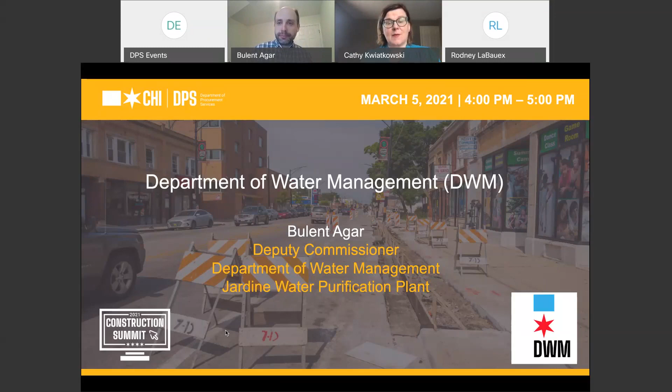Thank you, Cathy. I'm Bulent Agar. I'm the Deputy Commissioner over Engineering at Department of Water Management. I'm here representing Andrea Cheng, our Acting Commissioner. And this afternoon, we'd like to go through some of the projects that are coming up, but I'd like to give a quick overview of our department to highlight water and sewer and facilities sides.

And again, everything goes back to our most precious resource, Lake Michigan. Great Lakes is the largest freshwater body in the world, and we're lucky to have Lake Michigan, one of those 5 lakes, in our backyard. And just to put it in perspective, only about 2.5% of Earth's water is fresh water, which is what we need to survive. And Lake Michigan is the world's 5th largest freshwater lake. We're lucky to have it because it supplies water for our neighborhoods, our businesses, recreation, aquatic habitats.

And you would have noticed we got a lot of fluctuations with the lake, precipitation, evaporation, and runoff. And just recently, it has come to a point where it's kind of affecting our operations too, and CDOT's operations too with the lakeside. So it's an ever-moving target, ever-moving level where we have to maintain our operations 24/7 to ensure that we provide the clean and safe water for our residents, and also take away the sewer water to MWRD.

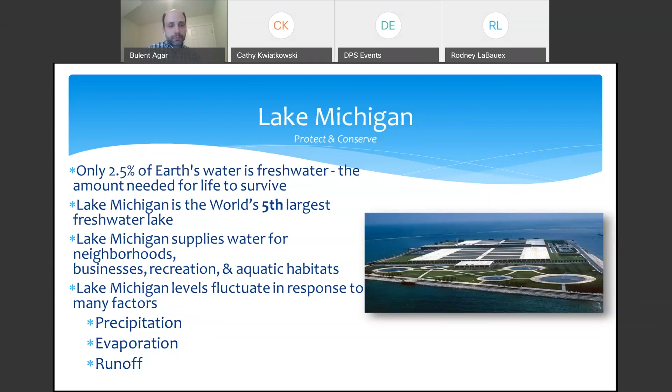In a nutshell, just to summarize what we do in our department, it's not just repairs and maintenance. It's basically getting all the drinking water treatment process done with our 2 purification stations, one Jardine and one Sawyer at Rainbow Park. So that requires work on water quality, which includes microbiology, chemistry, and microscopy, and water treatment from our plants. Our capacities are about 1 billion gallons per day for Jardine, and about 720 million gallons per day for our Sawyer plant.

We also oversee the water distribution system maintenance, which includes our water pumping stations, our operations and distribution through our grid of water mains, and engineering, which I'm a part of. We also have our combined sewer system maintenance work too, which includes operations and distribution section and engineering, overseeing all that work. And finally, we transmit our wastewater to MWRD for treatment. So basically, it's a gravity system that we have in the sewer, and we get the water effluent to MWRD for the treatment and further processing.

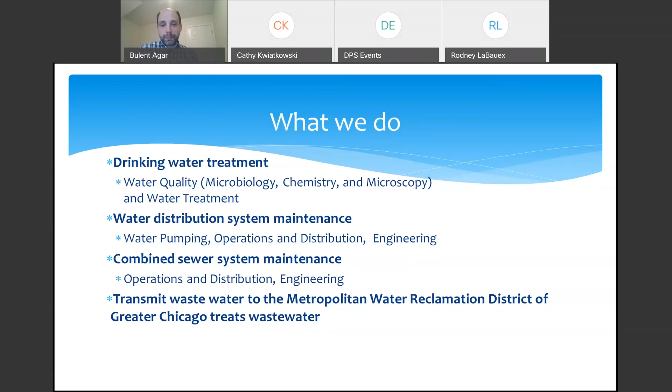Just to put into perspective what we're dealing with in terms of our customers. We're serving the city of Chicago itself. We're serving 40 plus suburbs, and our total population that we serve is about 5.3 million customers, which is about 42% of the population of Illinois. So it's not just the city limits, but also our suburbs too that we're serving.

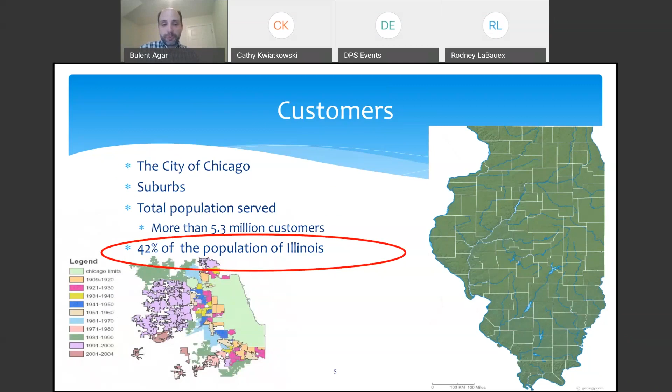To look at our water system a little bit, on the water side, our asset management side, we have two crib structures that are functioning. We have two of the largest water plants, which are in the top 10 in the world. We have 12 pumping stations, of which 9 are electric and 3 are steam powered right now. We don't have any elevated storage, so everything's pump on demand. So we have to adjust our pumping according to the demand during winter, during summer, during heat waves. We've got about 4,300 miles of water mains that we maintain, anywhere from 6 inches to 16 feet in diameter. We also have 48,500 existing water valves and about 490,000 water accounts that we oversee.

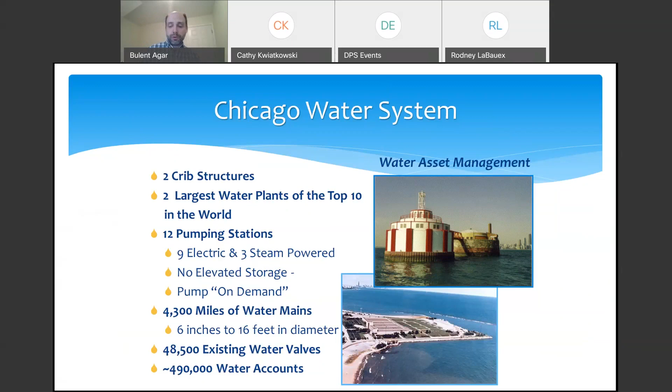Talking about the sewer system a little bit, it is a combined sewer system. We transmit the waste and stormwater to MWRDGC, as I mentioned before. We're overseeing about 230 square miles of a drainage area, and we've got about 4,500 miles of sewers, close to the mileage for water mains. Our sewer system sizes are from 8 inches to 21.5 feet in diameter tunnels. We also have 350,000 structures, which are manholes and catch basins.

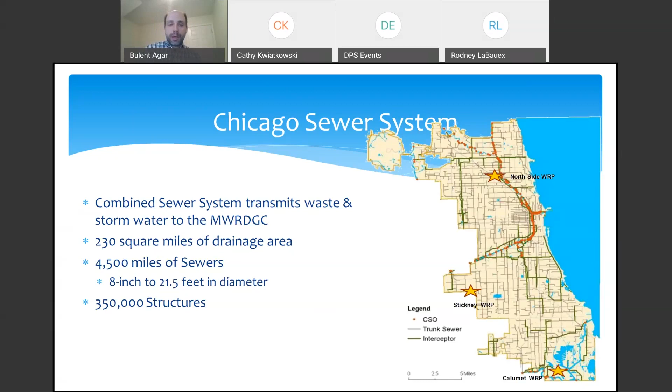So again, it's a lot of work to be able to keep the system up. It's a lot of work to be able to maintain it. So going into our 10-year capital program, I'd like to talk a little bit about that too. We've had a lot of mileage of water mains and sewers that are over 100 years old. Starting in 2012, we started a 10-year CIP program where we're actually doing double the usual replacement rate of about 1% of water mains. We are doing about 2% in the 10-year program, where our goal was to replace 880 miles of water mains. So far, we completed 756 miles of it.

We're also rehabilitating about 700 miles of sewers, about 220 miles of it with replacement at a larger size. The rest of it is sewer lining, where we keep the existing sewer but line the inside of it so that we give it another 50 to 75 years of useful life. We completed about 654 miles of that sewer rehabilitation. We're also lining about 95,000 structures so that we don't have to replace them, but line them internally to get another 50 to 75 years of useful life out of them. Of that target, we've completed about 88,300 structures so far.

We're also looking at our pumping stations in our facilities. We've got 2 pumping stations that we designed for conversion from steam to electric. One's completed already, Springfield, and one's under construction, Central Park. Those are the large projects we're dealing with to upgrade those pumping stations so that we can save on labor and maintenance costs. Obviously electric is a lot cheaper to maintain than steam powered pumping stations.

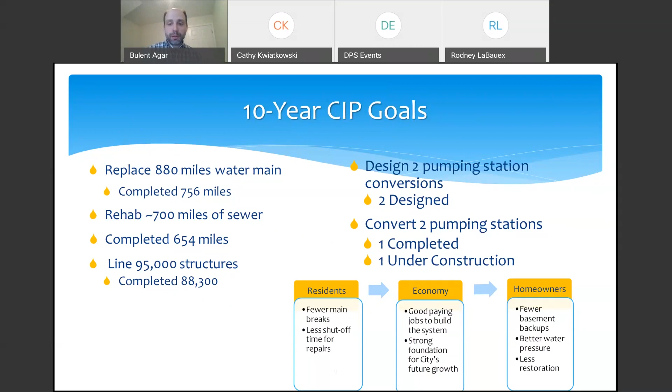For the homeowners on the sewer side, that also means fewer basement backups because we're upgrading our sewer system and have more capacity. And there's better water pressure because we have fewer leaks on our water mains, fewer shutdowns, and less restoration too. We're coordinating all of our work with different departments and agencies, especially CDOT, so that none of the other utilities come after us and rip into brand new pavement, or vice versa, we rip into brand new pavement. So that was a snapshot of our 10-year program in general.

I'd like to take a moment to talk about upcoming opportunities for consultants and contractors. On the water main side with facilities, we have new design consulting services coming up as an RFQ, usually about $5 million for 60 months. We are planning to advertise those this year in the second quarter, so it's coming up shortly. Those are term agreement style contracts.

The other project we're going to put out is the Western Avenue pumping station conversion, again going from steam to electric. That's probably going to be another 5-year contract, around $10 million in design costs. We're shooting for the second quarter of, apologies, that's 2021. We're going to get that fixed. It's going to be in the second quarter of 2021, when we're hoping to put that out as an RFQ. We also have our program management RFQ we're working on, also planned for 2021. Hopefully you're going to see that on the street shortly.

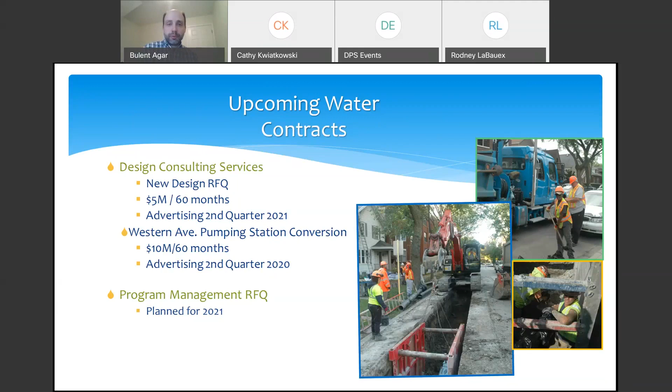Continuing with the facilities improvements contracts. In 2021, we're planning to put out our topographic survey contracts. Those are, again, term agreement contracts, about $4 million. We use those contracts to topo ahead of our design, get some survey done on the streets so we can capture the surface features, the streets, the trees, the curbs, and everything else, so that we can get that to our design section and design those projects for water mains.

So going to our facilities projects, our Sawyer plant, which is on the south side, we're looking at our low lift pump chemical building roof replacement, building roof projects, and boiler improvement projects coming out soon. And on the Jardine side, on Jardine plants, we're working on our preliminary design for the sediment force main right now. So that's going to be another construction job that's going to be coming out as soon as that's done, probably next year or so.

Going to the pumping station side, we're working on the design for our Cermak standby generator and switchgear project, Lakeview electrical and control improvements projects, and so those are going to be probably next year's construction. We're also working on, like I mentioned, since we're going to put out the design for Western conversion steam to electric project, we're going to be coming up with the construction portion of this too, which is probably going to be the 2023 job at this point. So just starting design now soon. So it would be about 2023 for Western Avenue.

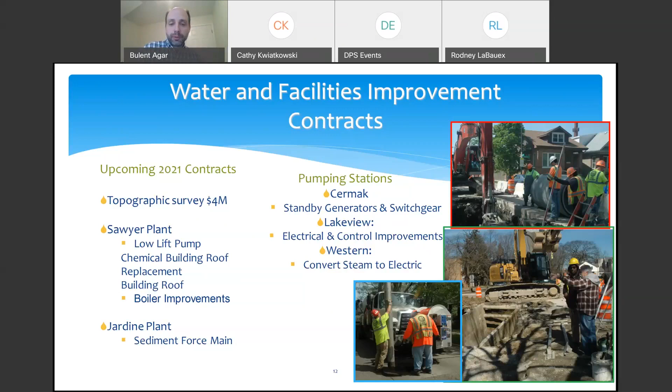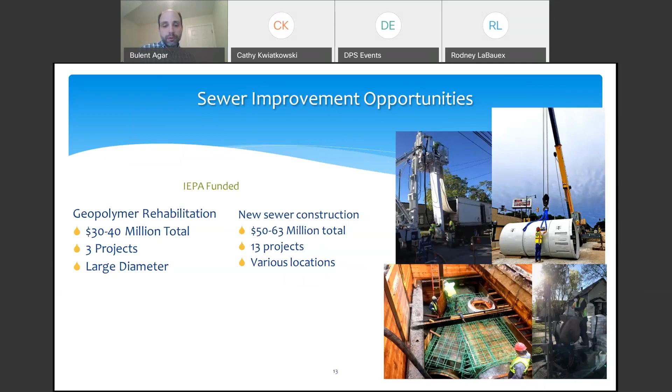Switching to the sewer side, sewer improvement opportunities. So almost all these are IEPA funded projects. What we're looking at right now is to put out 3 contracts for our geopolymer sewer rehabilitation project, which would be large diameter sewer lining in a way. Those probably would be totaling about $30 to $40 million, and that's going to be kind of like a spray-on method instead of the sock, pulling and pushing method. In looking at the new sewer construction projects, we're looking at probably $50 to $63 million worth of work to be put in throughout 13 projects at various locations of the city.

And just to go into a little bit more detail of that, advertising first or second quarter, it's probably going to be second quarter now because we're in the last days of March. We got these projects on Woodlawn and 78th Street and Harvard and 88th Street projects. On Garfield, on Pershing, Rogers and Greenview sewer improvement projects are coming up shortly in the same batch. And 58th Street and Parnell and 44th Place sewer improvement projects. Archer Avenue and Schubert and Lakewood sewer improvement projects are all coming up in the same batch. So those will be in the street shortly.

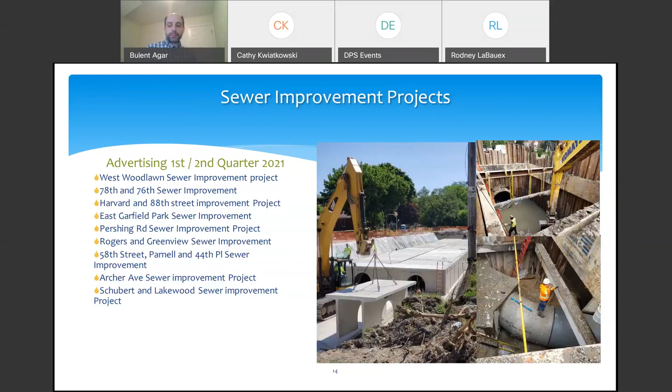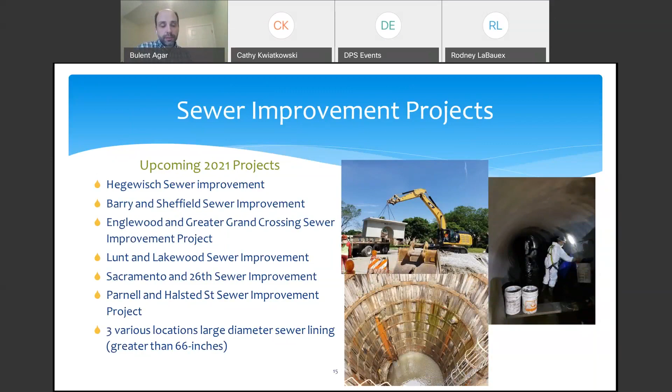And as a second batch of the projects, we're looking at Hegewisch, Barry and Sheffield, Englewood and Greater Grand Crossing sewer improvement projects, Lunt and Lakewood, Sacramento and 26th, Parnell and Halsted. And these are standalone private contractor PC projects that we're going to put out. And also, like I mentioned just a few slides before, the 3 large diameter sewer lining spray-on projects will be coming out this year too.

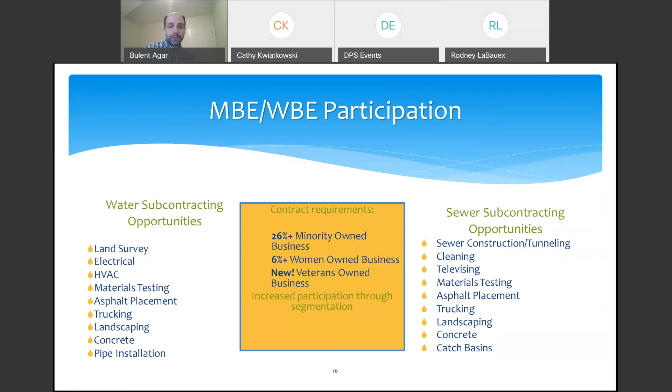And as always, minority participation is a big incentive for our projects too. On the water side, we got a few bullet points where we've identified that minority work can be performed, so there's opportunities for those too. And also on the sewer side, here are bullet points similar to on the water side too. And again, we're looking at a minimum of 26% MBE, 6% WBE, and the new initiative, Veterans Owned Business, which is the VBE. Those are a little bit lower in percentage, but we are including those in our projects that are going to go out soon and to be advertised. So that should give quite a lot of opportunities for minority subcontractors and consultants to be able to be involved in these projects.